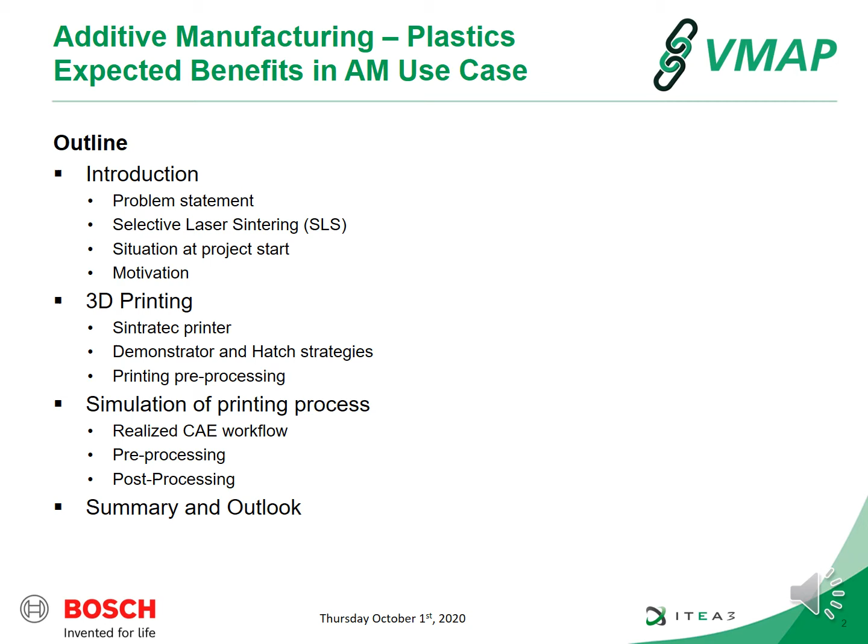This presentation is the result of a collaboration between Bosch, Hexagon e-Xstream, and Sintratec, and has been developed within the publicly funded project VMAP. The outline of the presentation includes an introduction, a block on 3D printing of plastic parts, a block on simulation of the printing process, and a summary and an outlook.

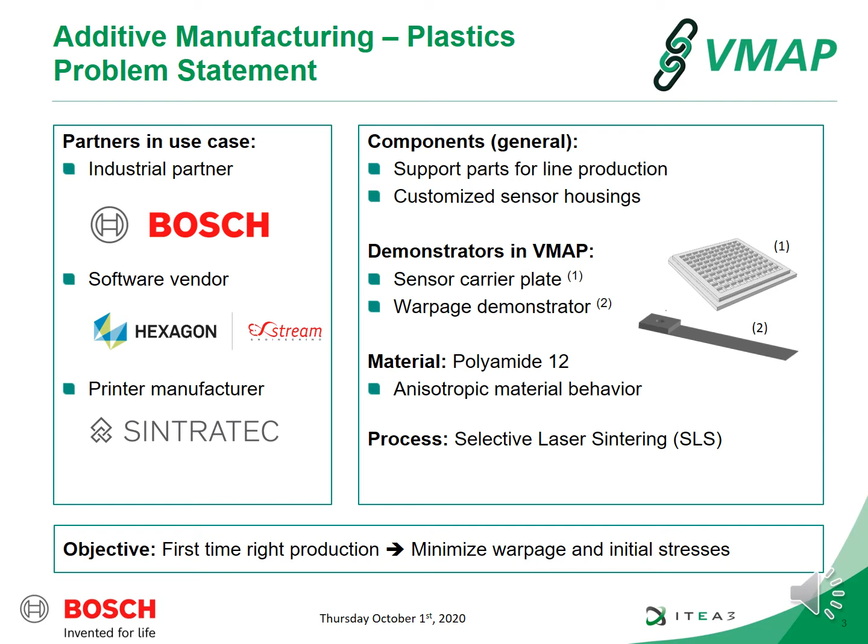The components considered in this use case were support parts for the production line and customized sensor housings. The demonstrators considered were a sensor carrier plate and a warpage plate as depicted in the pictures. They were made of polyamide 12 by SLS laser sintering. The objective of the project is to achieve first-time right production by minimizing warpage and initial stresses in the simulation phase. The selective laser sintering process is a process suitable for small series production of parts which need high customization.

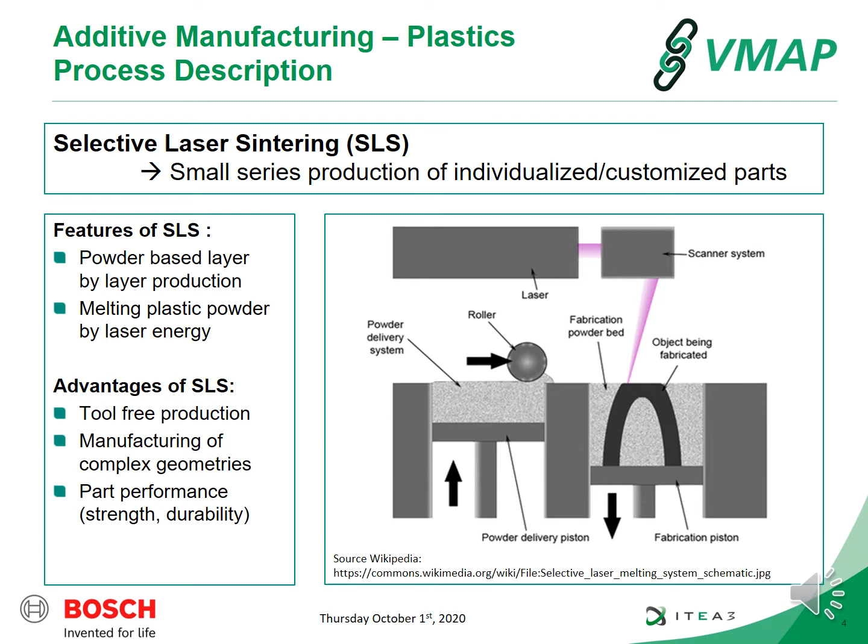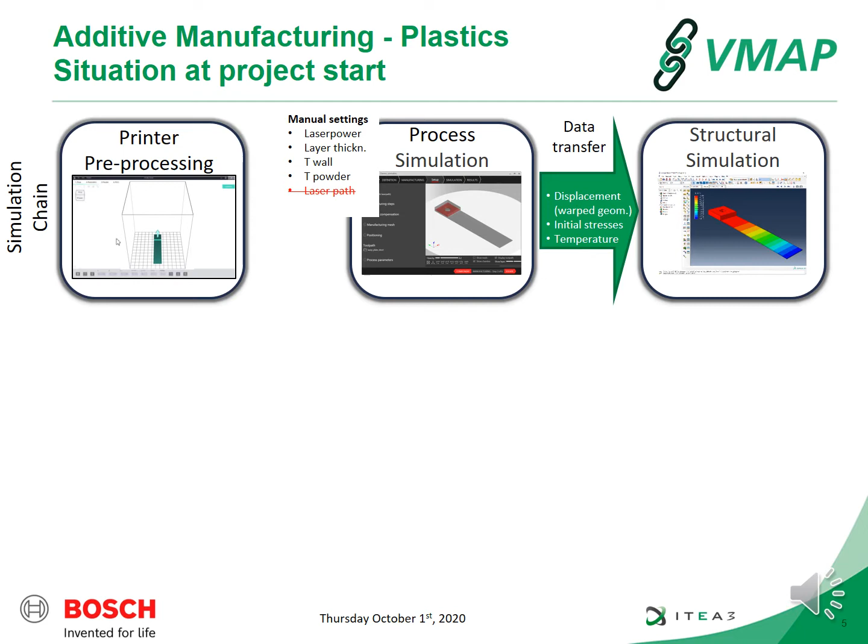Referring to the simulation chain for 3D printed plastic parts, the situation at project start was that the printer parameters had to be manually taken over in the process simulation. There was no possibility to consider the actual laser path used by the printer. In particular, no interface was available between Sintratec printers and the software Digimat AM.

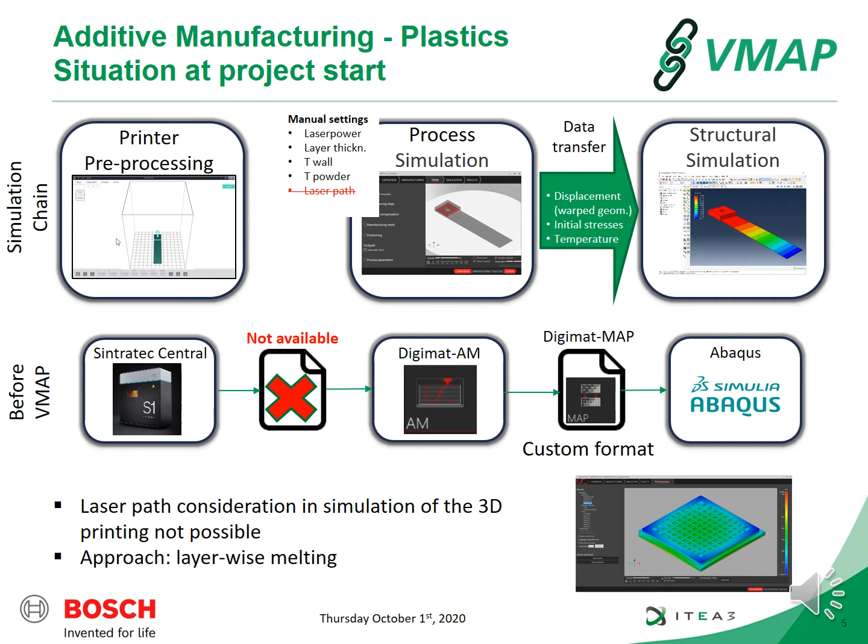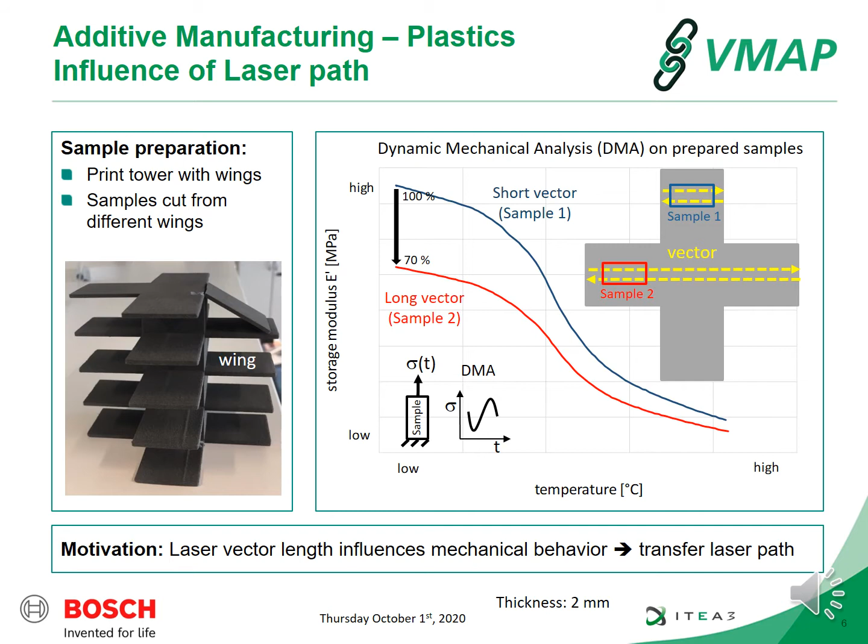Why is the laser path so important for 3D printed parts? You can see here how samples extracted from a cruciform specimen at different positions result in strongly different mechanical behavior. Sample 1, presenting a short vector length, behaves about 30% stiffer than sample 2, which had a longer vector length. The laser vector length is thus strongly affecting the mechanical behavior of the part and needs to be considered in the simulation of the printing process.

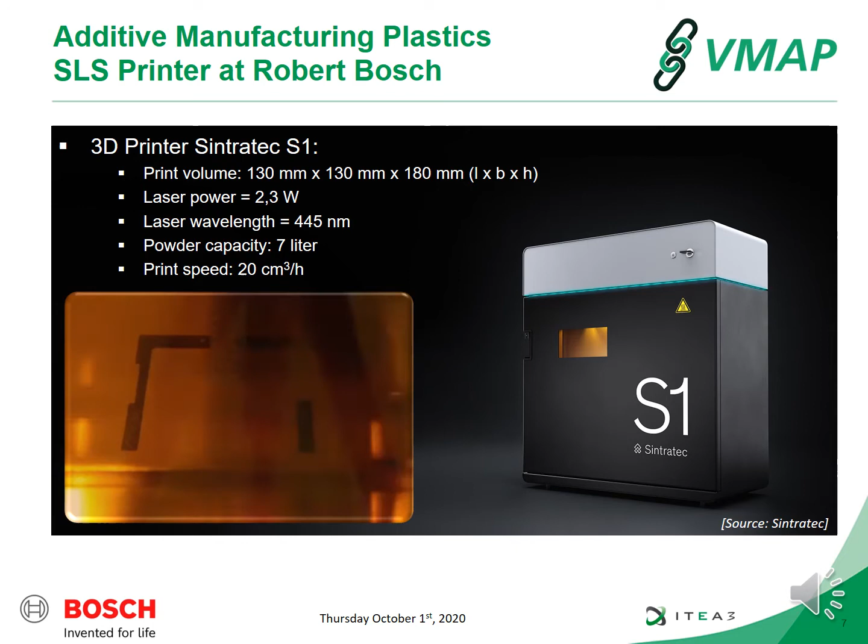Here you can see the warpage demonstrator considered in this project. The warpage specimens were printed on a Sintratec S1 printer at Robert Bosch, considering one specimen per build, and the material used for the printing was a PA12 in black color.

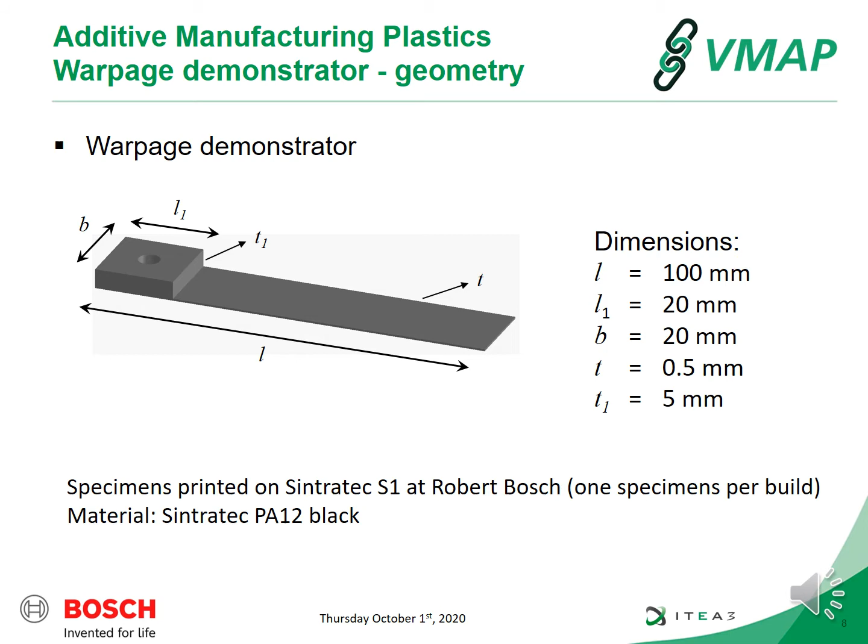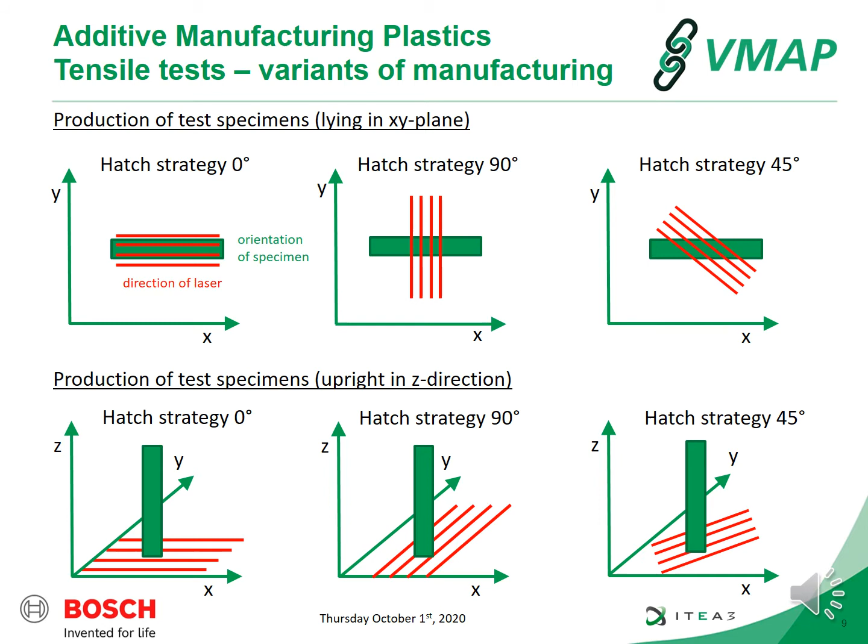I want to show you now how the pre-processing on the Sintratec S1 works. The first step is to upload a part geometry. Then you proceed in defining the positioning of the part within the building chamber. In the next step, the print parameters are defined. We select, in this case, custom parameters, and we proceed with entering a layer thickness, in this case 100 micron.

Next, a hatch strategy is defined. We select again custom and enter an angle of plus minus 45 degrees. The angles are entered in radians in this case. We can further check if other parameters are okay and proceed to the preview. You can see here how the laser path looks for each layer. And indeed, we recognize the plus minus 45 degrees angle. This is a close zoom on the part. If you want to recognize the shape, you have to zoom out.

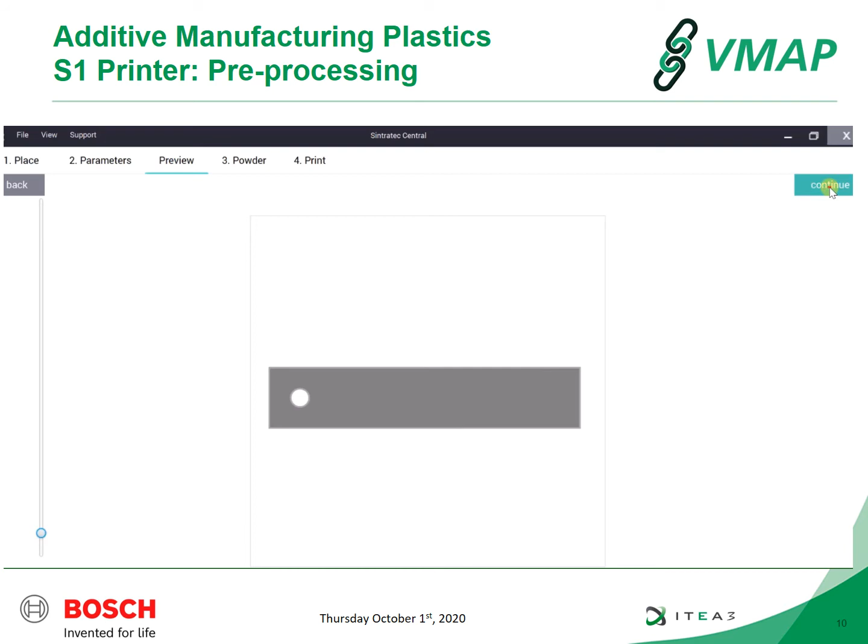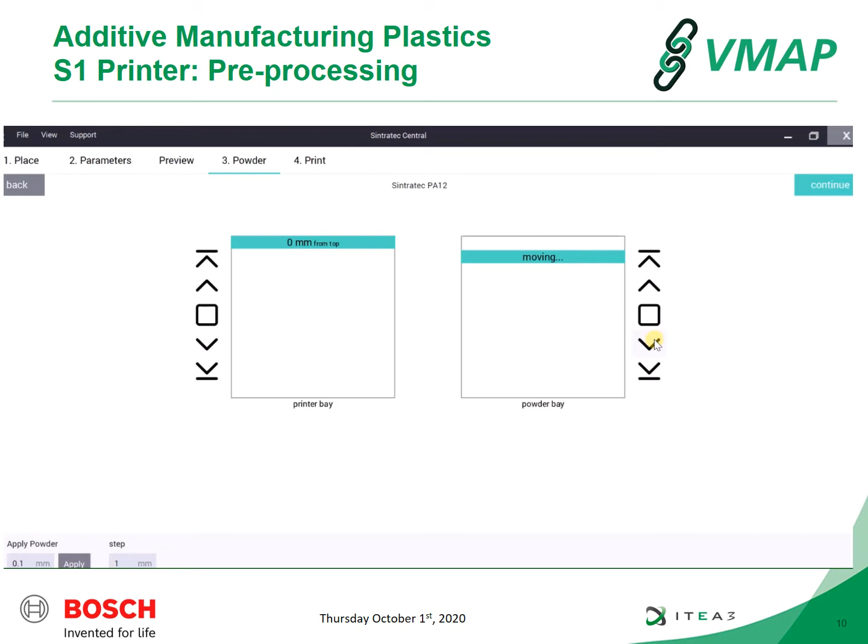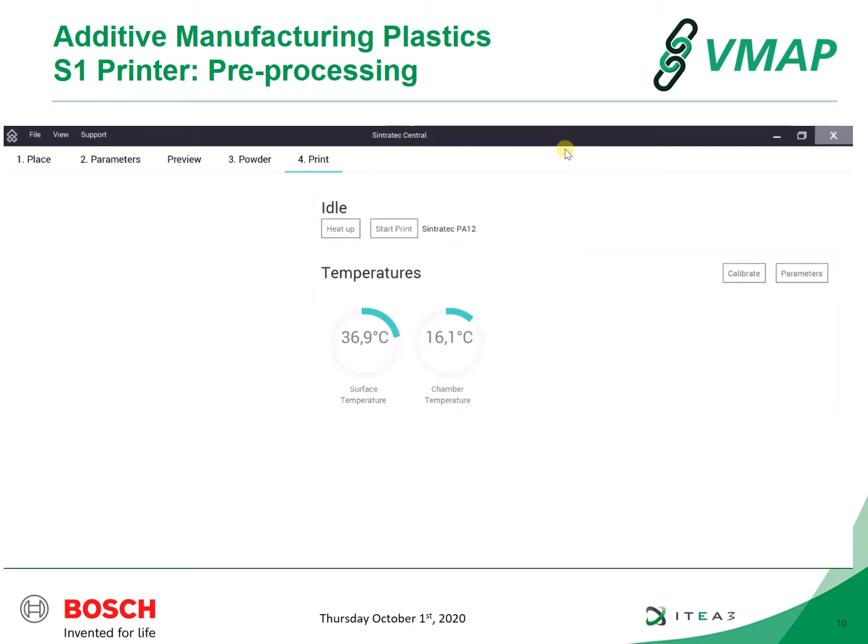In this mask, the position of the pistons for both the printer and the powder bay are defined. The first action is to define an increment of the movement of the pistons in millimeters. We can further proceed in setting the parameters of the temperature, both for the heating up process and for the chamber during the printing. The last step is to choose the laser speed. Before starting the printing job, you could also define some scaling parameters for correcting warpage and shrinkage of the part. This done, the printing job can be started.

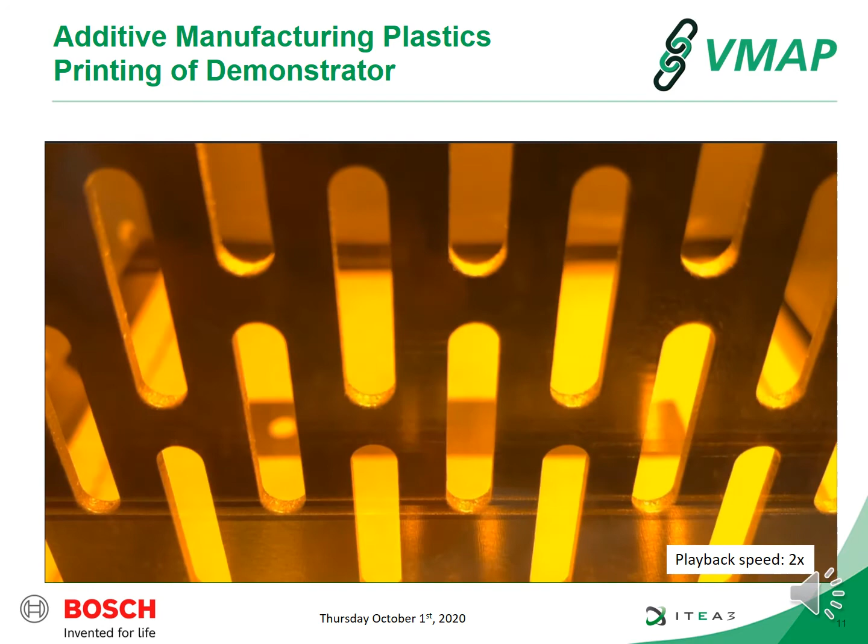In this video, we can see how a printing process on the Sintratec S1 proceeds. The build chamber is protected by a metallic grid, and you can see the progress of the laser beyond this grid. A warpage plate is printed with a hatch angle of 45 degrees from the left to the right. The temperature of the layer is being actively controlled by infrared lamps, which modulate their intensity accordingly. Once the sintering layer is completed, the laser proceeds in refining the edges until the piston prepares for application of the next powder layer.

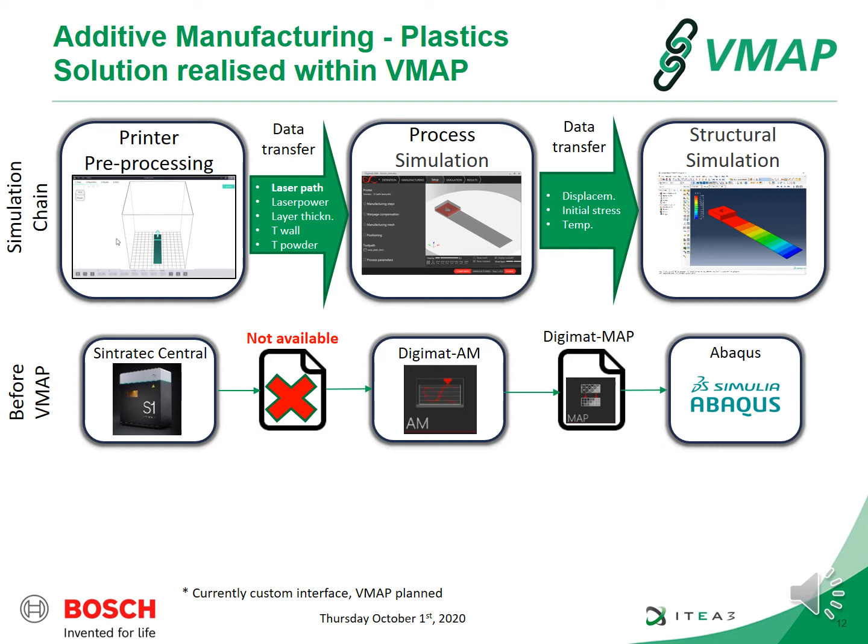This slide is showing the interface developed within the VMAP project, enabling the transfer of information from the 3D printer to the process simulation software. This interface, which was not available at project start, allows to consider the actual laser path together with further printer parameters in the process simulation.

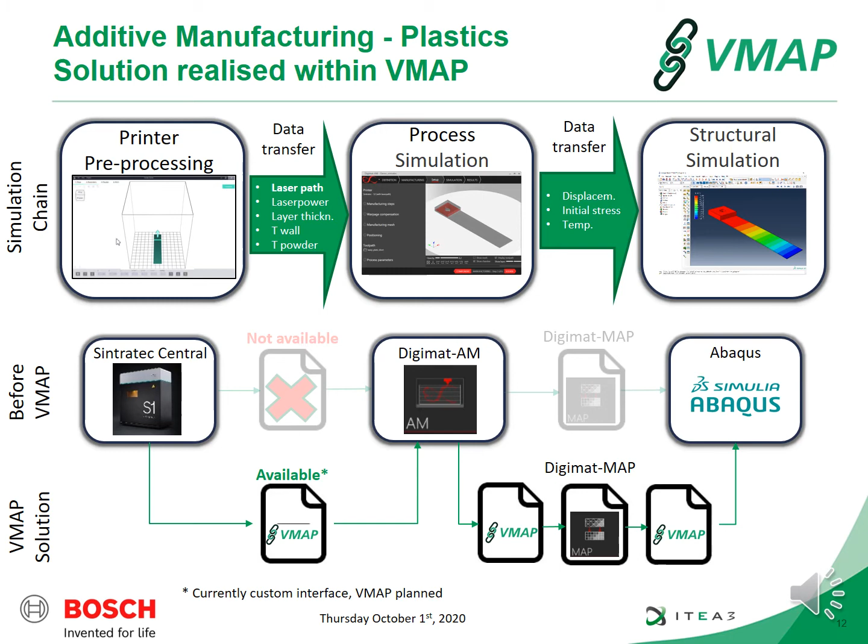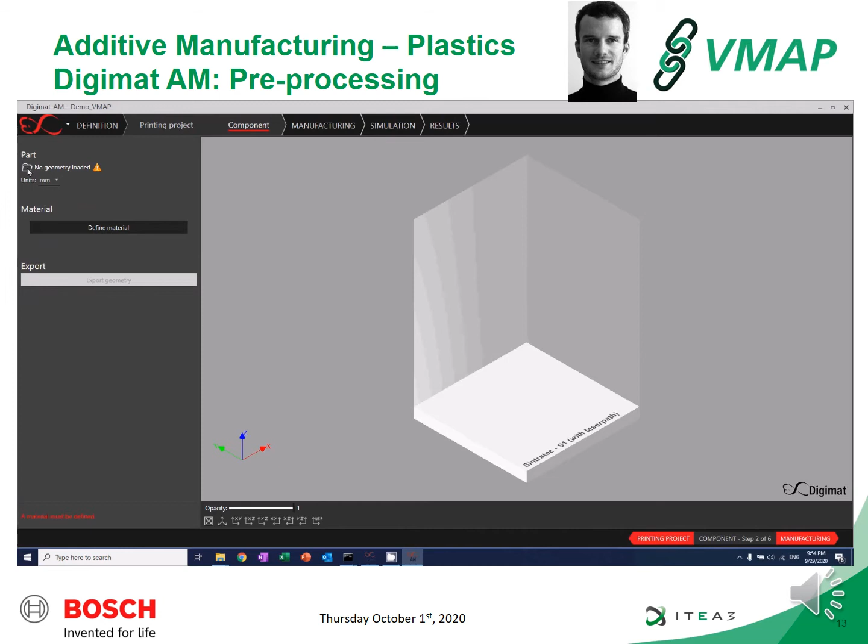We are going to review together how SLS process simulation can be performed in DigimatAM. In this video, we can see how the pre-processing in DigimatAM works. The simulation follows the physical printing workflow, and we first need to select the process, SLS here, and then the printer, where we can select the Sintratec S1 printer.

Then we will be able to select the geometry. So this is the warp plate under an STL file format, and define the material. This is the PA12 powder provided by Sintratec in the Digimat MX database. Then the next step will be to define the process parameters.

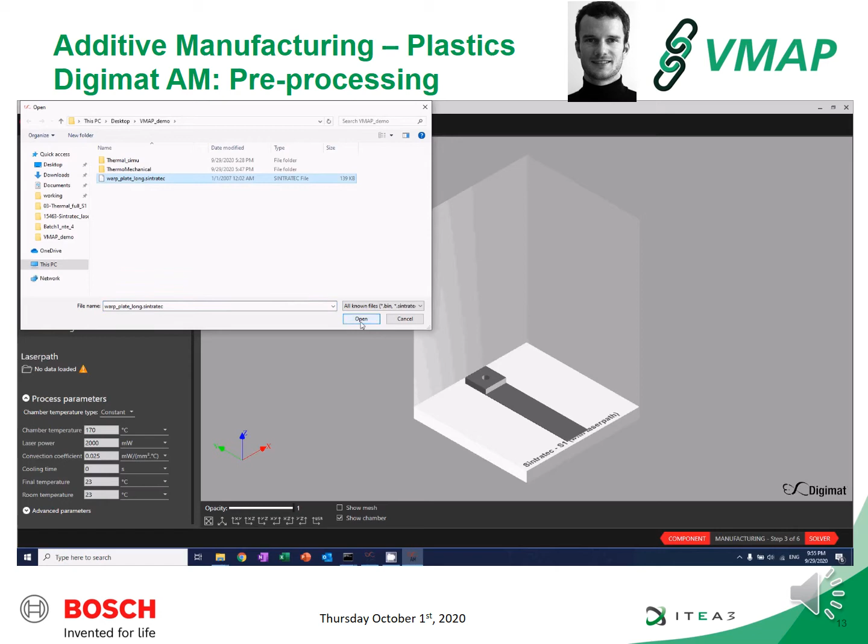We have been able to create an interface with Sintratec pre-processing software to load the laser path in DigimatAM as is illustrated here. So the laser path in red is superimposed to the geometry. We can also animate the laser path to check that it's correctly overlaying with the geometry.

Then we can also fine-tune further some of the process settings, such as the chamber temperature. Then we also have the laser power, the scan spacing, and finally the laser speed. Further to this step, the simulation is set up. So the part is meshed with a voxel mesh of 0.5 millimeters made of voxels.

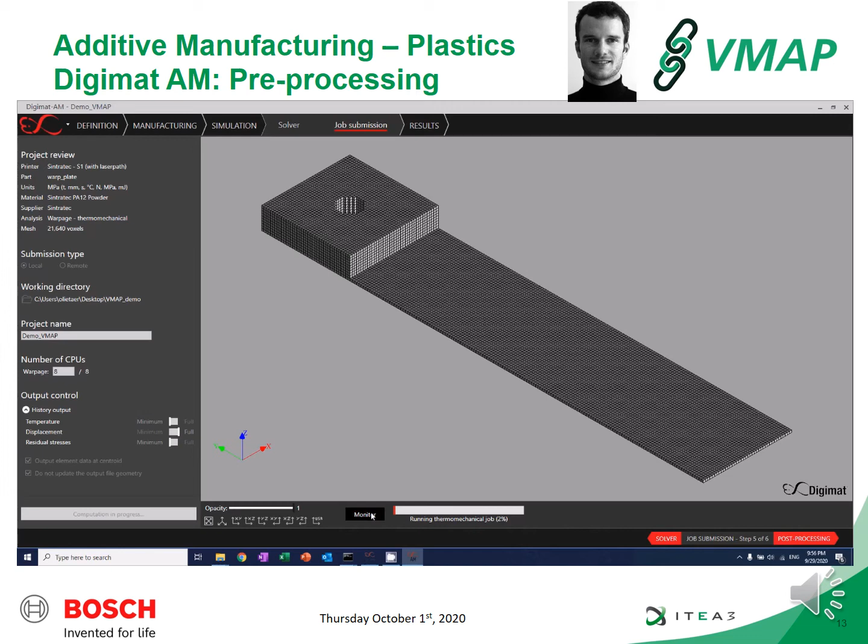And then finally, we can go to the job submission tab, where we can select the number of CPUs and finally submit the job. Once the simulation is completed, the results can be analyzed. On the left, you can see the animation of the SLS build with the part and the powder, and the part is depicted in black. That allows you to have a very good insight of what is happening inside the chamber.

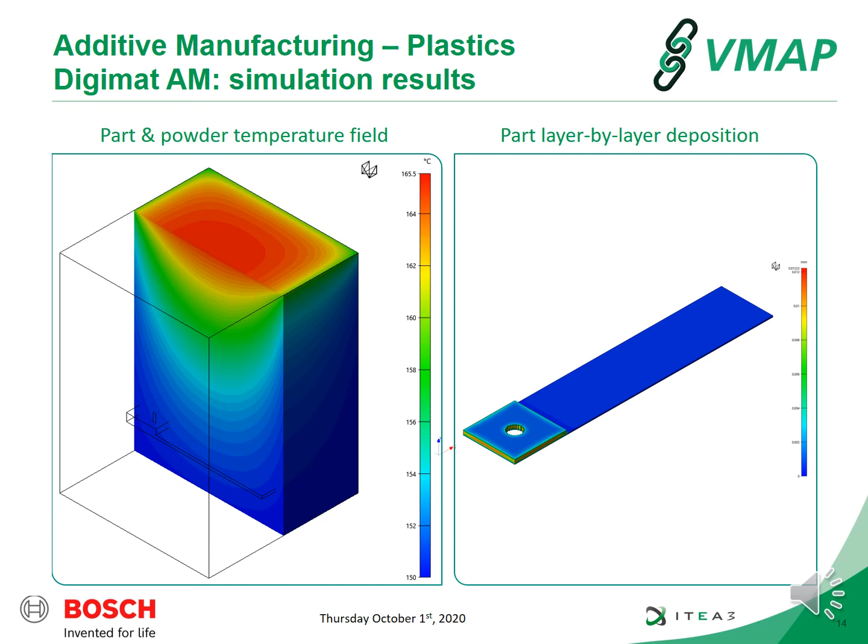On the right, we have the deflection of the part that is illustrated layer by layer. Other typical results can be processed, such as the residual stresses or the crystallinity. And in particular, the results can be exported to another software to, for example, take the residual stresses into account in a static structural simulation.

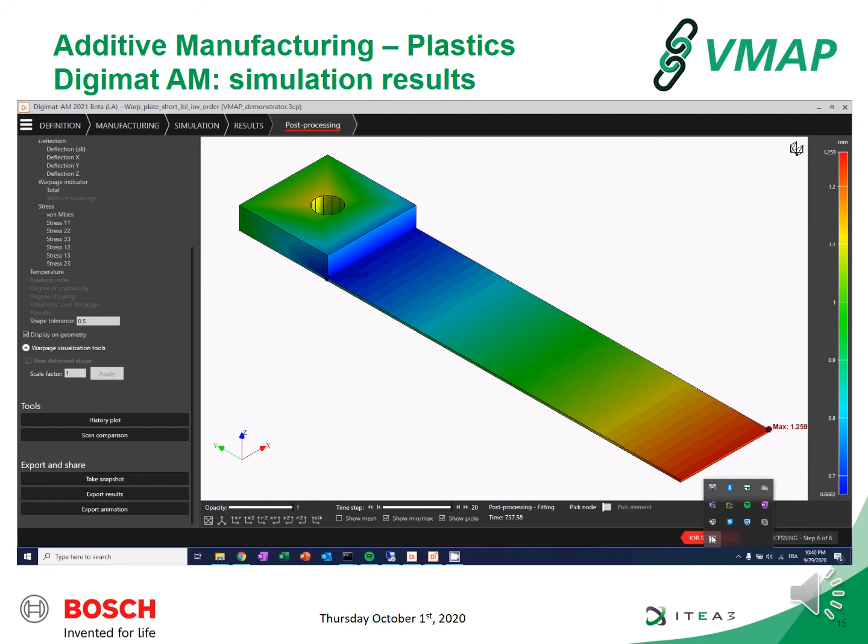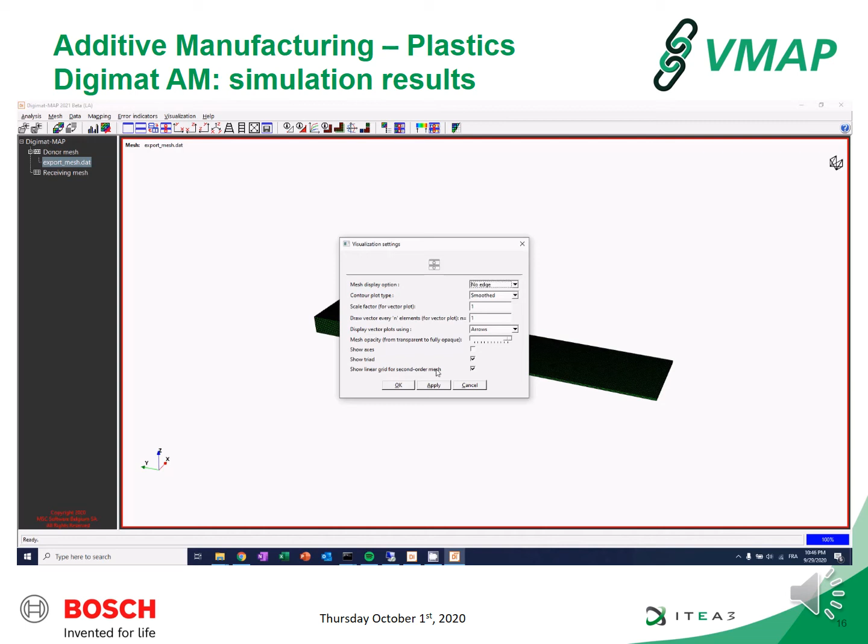Once the results have been exported, they can be imported within Digimat-MAP for further processing. So here in this case, we are uploading the DigimatAM voxel mesh and also some of the results. So this is the finite element mesh that was used by the process simulation.

And then we can also, for example, load the residual stresses that have been exported. So this is what is done here. And we will also display the first component of the stress. And once this is done, we can export these data under the VMAP file standard for interconnection with any other software.

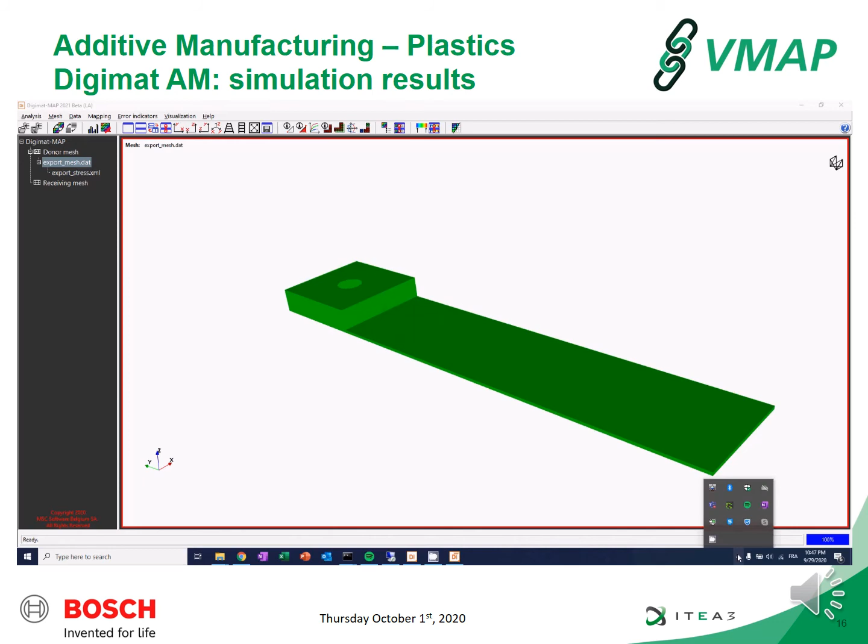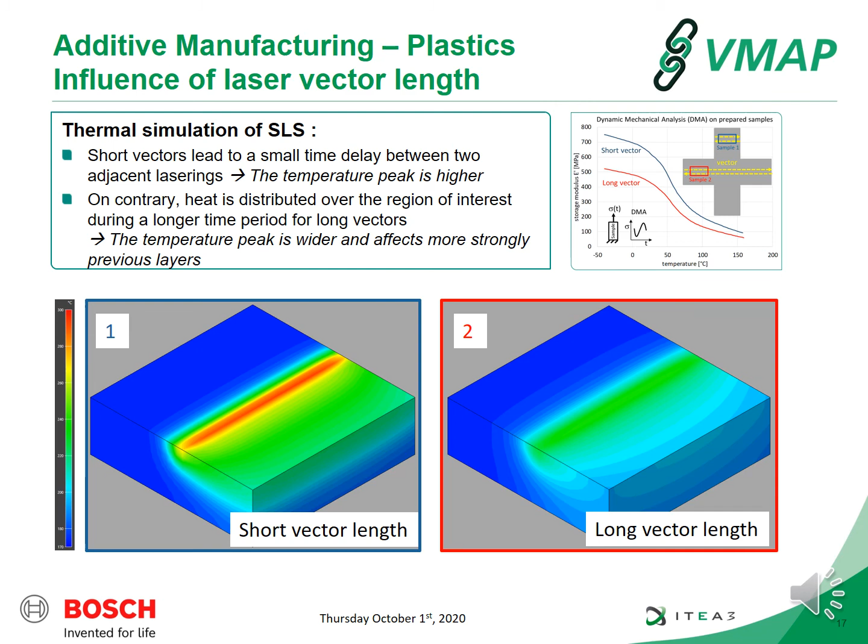The simulations in DigimatAM considering the laser path can also help to explain the difference in mechanical behavior between different vector lengths. Referring to the cruciform specimen already considered, you can see that the vector length in sample 1, which is the shorter one, presents a higher temperature peak compared to sample 2 with a longer vector length. The higher temperature peak will result in a better melting behavior of the powder and thus a better consolidation of the material. Hence, higher mechanical properties are resulting.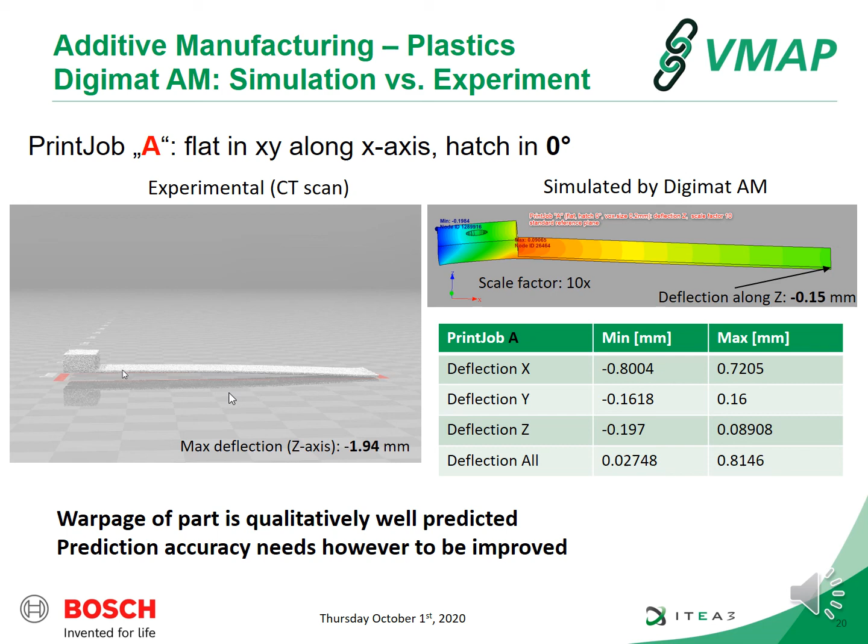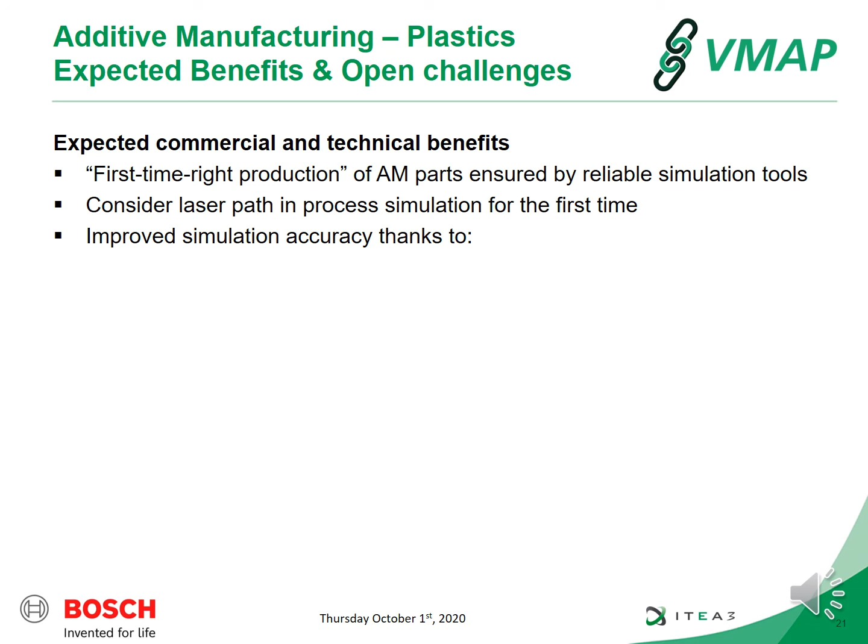Finally, coming to the expected benefits of the project. The establishment of a reliable simulation chain will enable the first-time-right production of additive manufactured parts. Considering the laser path in the process simulation was implemented for the first time. Further, an improvement of the accuracies of the simulations was achieved thanks to a transfer of the printer control parameters to DigimatAM and an advanced material characterization and modeling of the PA12 powder.

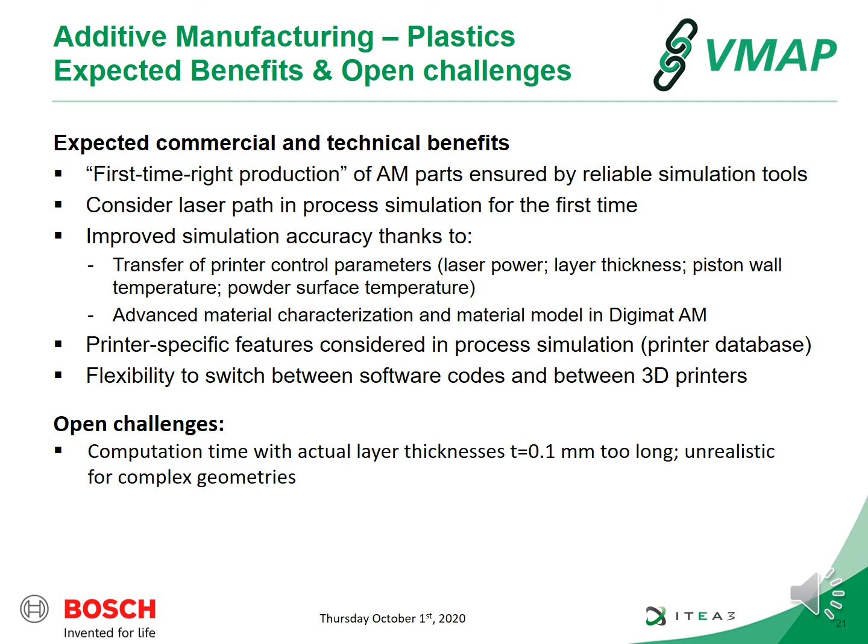Having the Sintratec printers in the printer database of DigimatAM and adopting the VMAP standard was further enabling an easy data transfer and an easy exchange of CAE tools along the simulation chain. Additive manufacturing simulation is, however, still at a low maturity stage, and some challenges still need to be addressed, such as improving computation time, considering multiple parts within one build, and ensuring the consistency of shrinkage parameters between printer and simulation code.